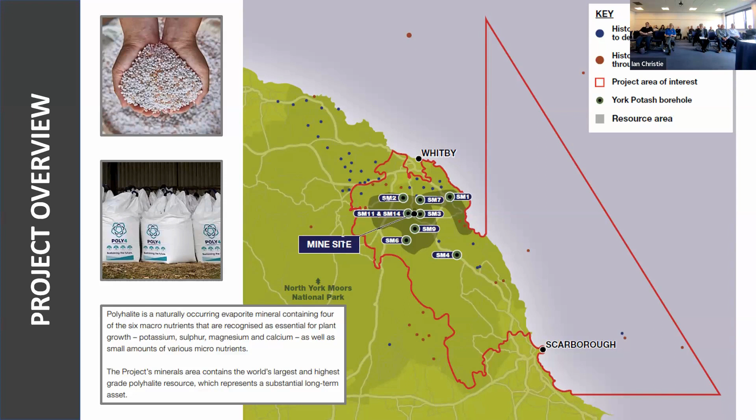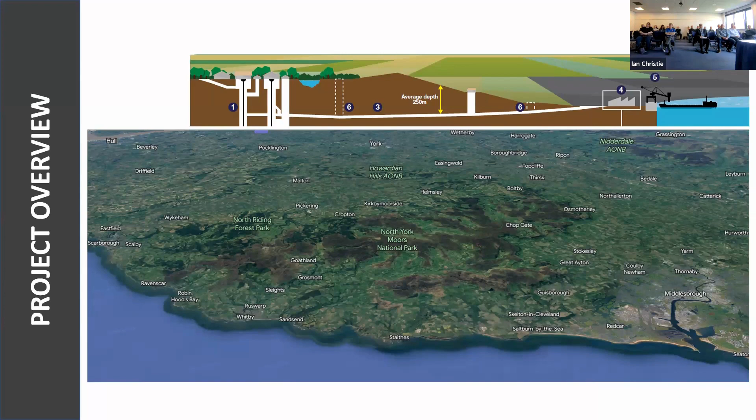So it's not to scale, but it gives you an idea. If I just crop that diagram up a bit, and I've taken a screenshot from Google Earth, there's Middlesbrough, and Whitby's about 3/4 of the way across. Because the site doesn't just comprise Woodsmith Mine, there's kind of 4 locations really.

We've got Woodsmith Mine where the shafts are, near Whitby, just up onto the hilltop. We've got an intermediate shaft called Lady Cross, that's in construction at the moment. We've got another intermediate shaft about halfway along the tunnel, Lockwood Beck. And then we've got the materials handling facility.

So what links them all is this tunnel. You might have seen on LinkedIn, Strabag, they're driving this tunnel using TBMs. Originally we were meant to launch 3 TBMs, one from Whitby coming this way, one from Middlesbrough going that way, and then one in the middle from Lockwood Beck. I think I've got the next slide on it, running whichever way it was running - 3 TBMs.

Basically, when Sirius Minerals got into difficulty with money, things had to be chopped and changed around. They decided to get rid of the other 2 TBMs, and this TBM will do the full 37-kilometre run. It's now broken some world records for the length of 1 TBM tunnel, I think.

I think we're just near Lady Cross. It's got about 1.5 years to go yet before it actually gets to Woodsmith mine at Whitby.

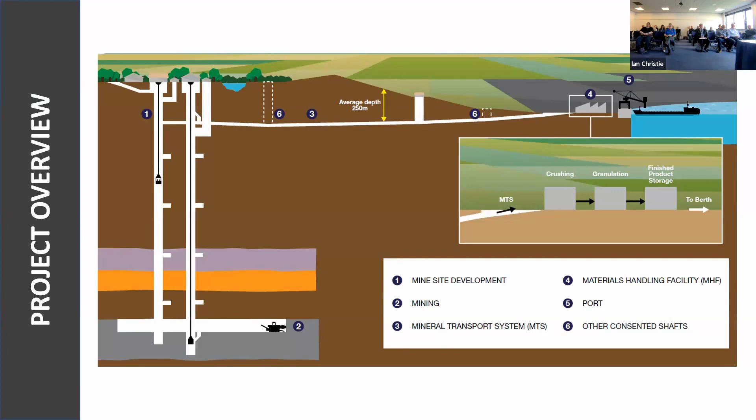So the tunnel is going to transport the mineral when we extract it from a mile deep. It's going to come up the deep shaft and then travel along that tunnel on a conveyor belt, taking all the trucks off the roads. Obviously in the quarries we're used to the trucks leaving, other than Glensanda, a place like that. So this takes all the trucks off the road and it goes all the way along the conveyor belt to Middlesbrough. That's the purpose of the tunnel.

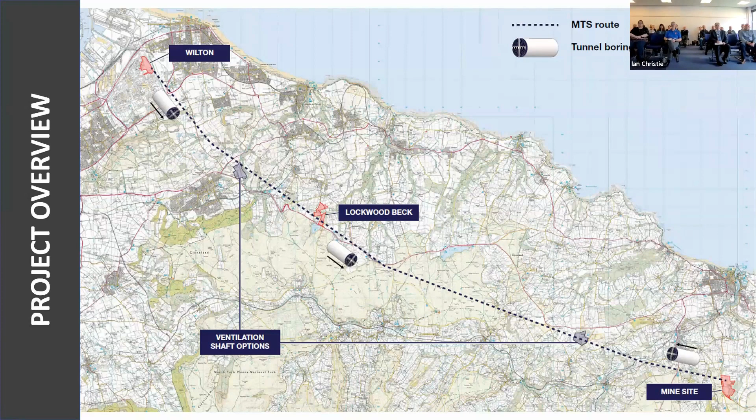So we're underway with that. This one just shows you them 3 TBMs. So it was Lockwood - one from Middlesbrough to Lockwood, one from Lockwood towards Whitby, and then one from Whitby. And they sort of scrapped them too. We didn't even get going with them.

Current figures, what we at, Charlie? About 750 meters on one of them. Yeah, 750 at one and 6 to 8. So we're sort of near enough halfway on one of them. The other one started later, so it's a bit behind - a few months behind.

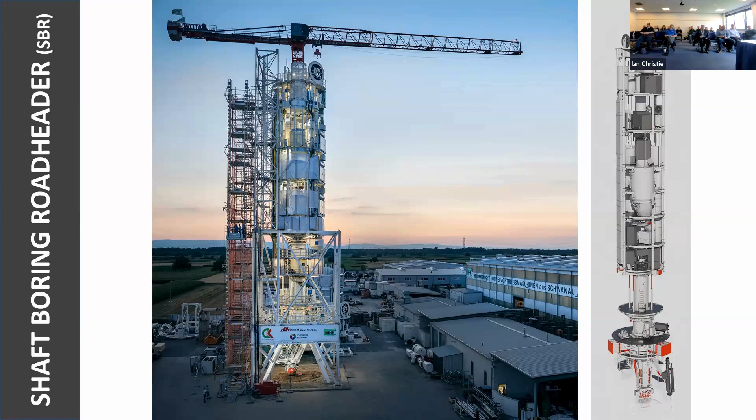So it's got a head with the picks on, the drum spins, and as it swings forward it takes out what we call pizza slices, basically. It just keeps cutting the rock, keeps going down.

So that's the deep shafts. The shaft that's just to the side, this one - this is where they were going to launch one of the TBMs, the one going the other way. Even though it got scrapped, we still need this shaft and the tunnels in it to access all the different levels underground, keeping everything below surface.

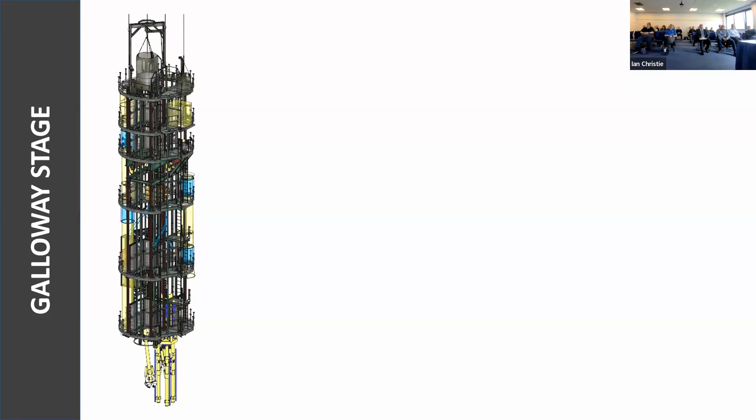So this is the one that I work at mainly. This one is kind of old school - this is drill and blast, because it's not deep enough to warrant buying an SBR like on the other shafts. I mean, we're only sinking 350 meters, and the SBR is 64 meters tall. Like, it was not worth it.

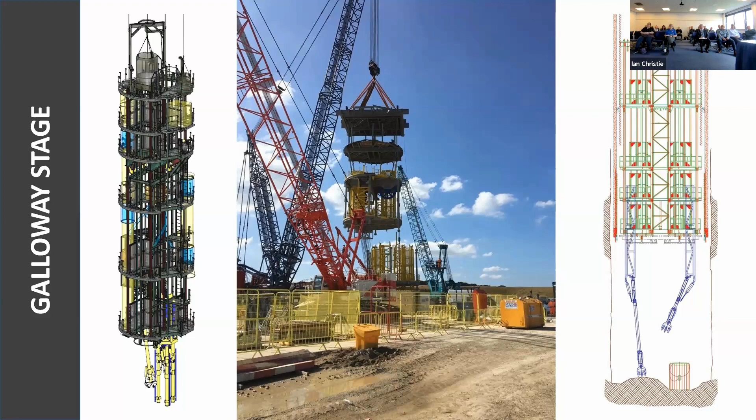Concrete lined, ventilation running down the other side, with air and water pipes. That Galloway stage can move up and down the shaft - it's on the ropes, and we tell the windman to move it up and down.

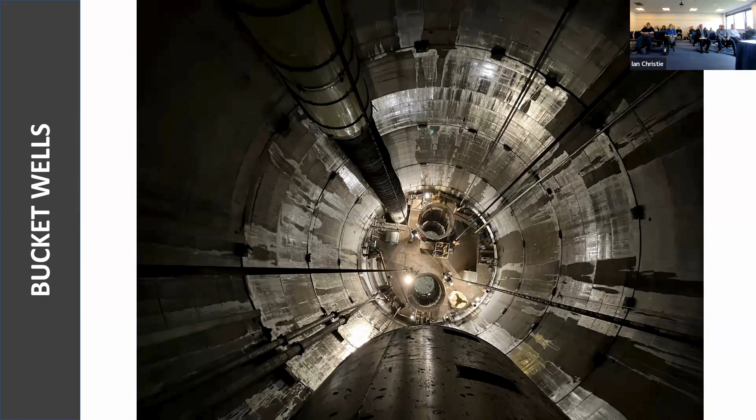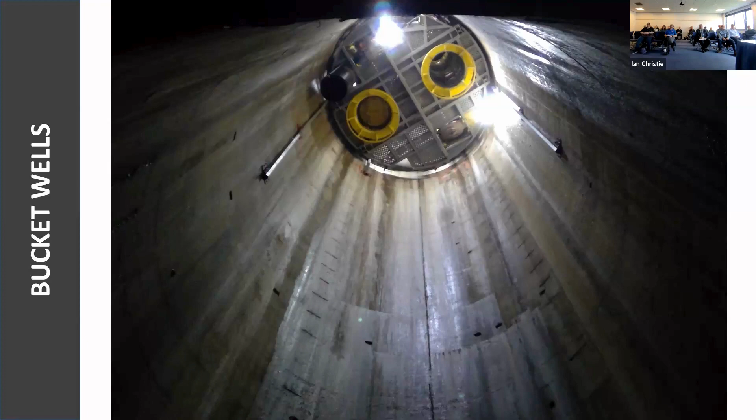That's me looking back up. If you look at those two holes, the one on the left has a bucket sat there. They're only 1.9 meters diameter, so everything you need to get through has to fit through a 1.9 meter circle. In a bit, when you see other images of the machinery we've got down there, I can't believe how we've squeezed them through the gaps.

That's another image looking up. You can see the two grabs - they're locked into the Galloway, and when we need them, we lower them down and they grab the blasted rock.

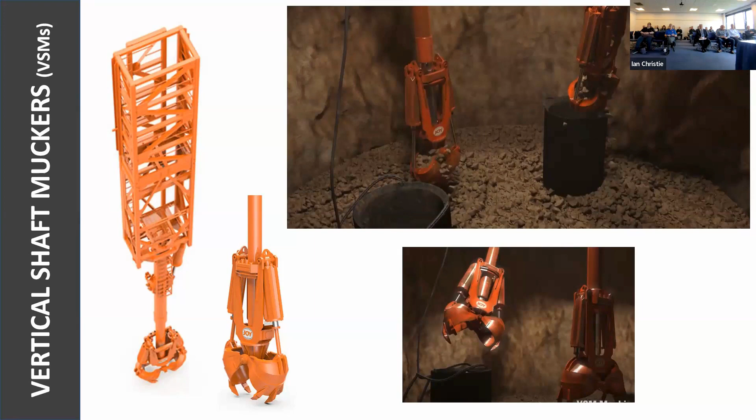Komatsu VSMs, vertical shaft muckers. That's a video on YouTube, an animated video, and that's what they look like - monstrous things, you don't want to be close to them when they're operating. Nobody's allowed down, everyone has to stay up on the Galloway stage, quite vicious things.

So that's the mucking cycle. Just flipping back to the drill and blast bit - Jumbos, we've got two of them, but both have got two drills, so we can have four drills going at once. These are again monstrous, 14 meters tall.

The hammers, everything was too overpowered for the mudstone we were in, but it did the job. They'd be better suited for a granite. That's kind of like the mudstone we were going through - well, we're still in it now.

Just watch your fingers, it does get a bit sharp. When the air gets to this rock, it sort of starts to crumble a bit - there's bits and pieces falling off all the time.

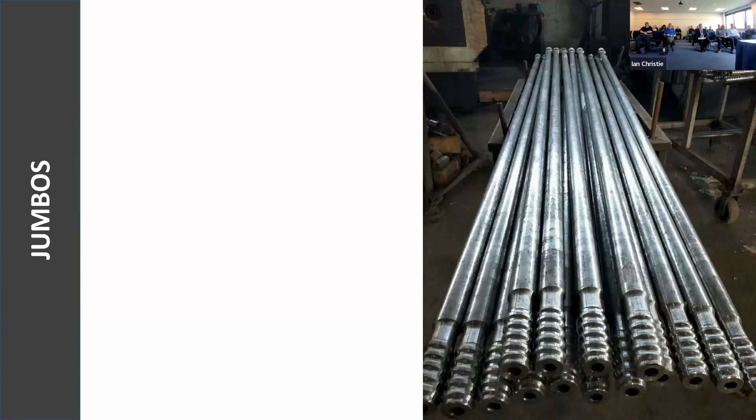Drill steels were 4.8 meters, T38s, top hammer, button bits. We tried some cross bits, but with that many people on the drill rigs, you never really got feedback as to which they preferred. I had some lads say, oh, we like the cross bits, oh, we like the button bits - made no difference to me.

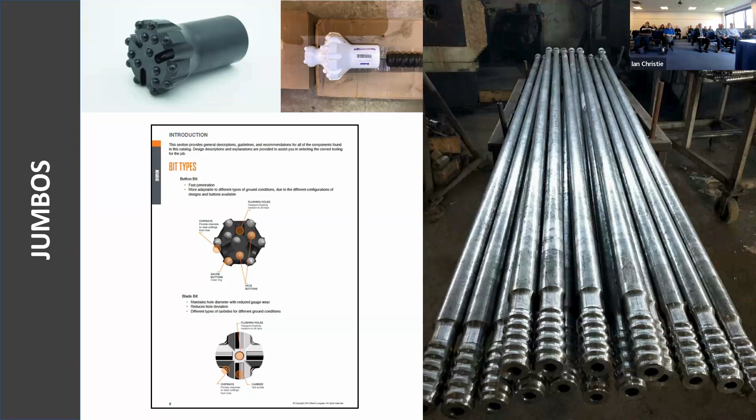So we drill the hole with 64 mil top left, and then we ream it out with this bigger 127 mil drill bit, the white one.

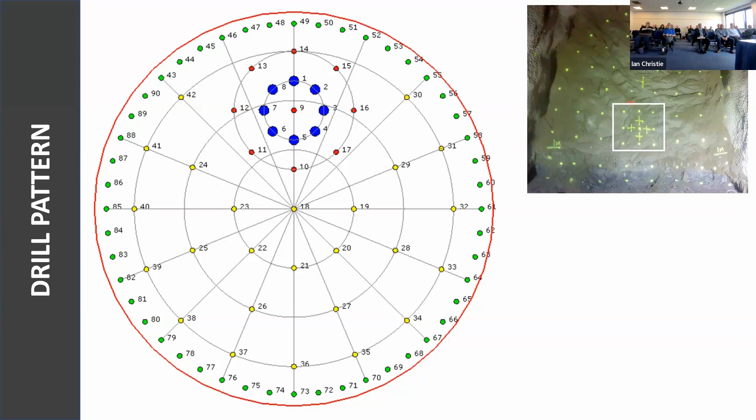So we had void holes 127 mil, cut holes 64 mil, bulk holes 64 mil, perimeter holes 64 mil. And there's other names you might have heard in the past, like ream, easers, contour.

When we started with Redpath, the Canadian shaft sinkers who are here on the project now, they weren't there at the very start. So when we started, it was just Gallagher's and Anglo-American.

I made this little tool out of a piece of 110 volt cable and a bit of wood. All I said to the shaft tech was, give me the centre of the shaft. I'd get someone to stand on that, then I'd pull it out and swing the wire around, and when it pulled onto one of these tape marks where the little red tags are, that's where I'd spray the dot.

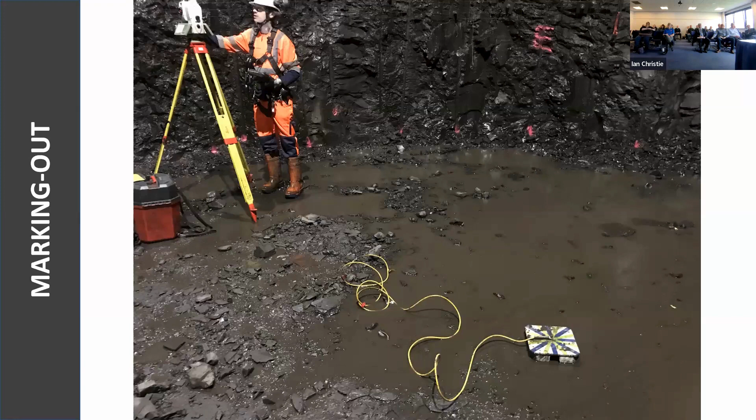So that's me marking it out, and that's the result. It was quite good, working from the centre, just swinging it around, spraying the dots.

The Canadians were like, no, what are you doing? We do it from the edges in. And I'm like, well, it's whatever you want to do, but that's what we're doing at the moment. We're rolling with it, and there were no issues.

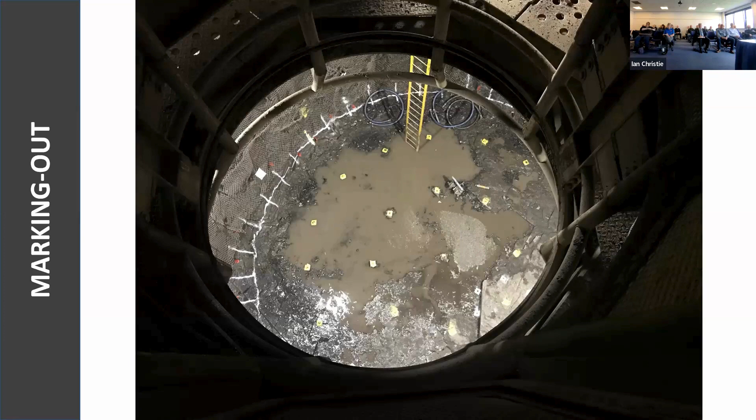If you look at this one, that's a mega blast we did with three burn cuts in it. That was the biggest blast we did. It was when we started to widen out, so it was quite complicated to mark it all out, do you know what I mean?

There you go, that's what it looked like on the Shot Plus software. When we widened out, there were four big blasts we did, and this was the biggest one.

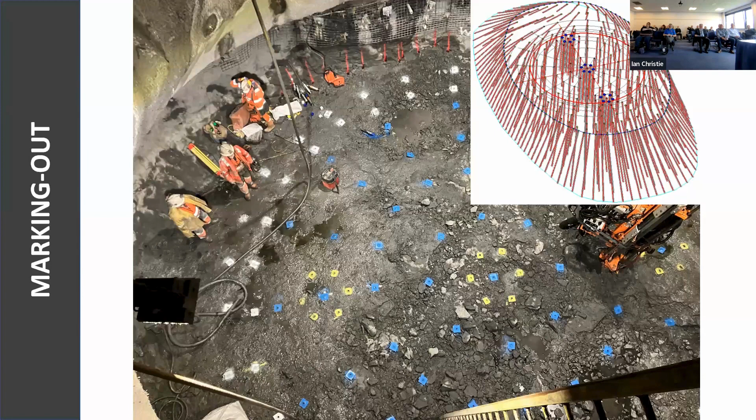After all the years of quarrying, I remember doing some really complicated blast designs at Glen Sanda, with 3D modelling over lumps and stitching together surveys. But that's probably the most complicated one I've ever had to do, because the angle on these was something like 40-odd, 50 degrees.

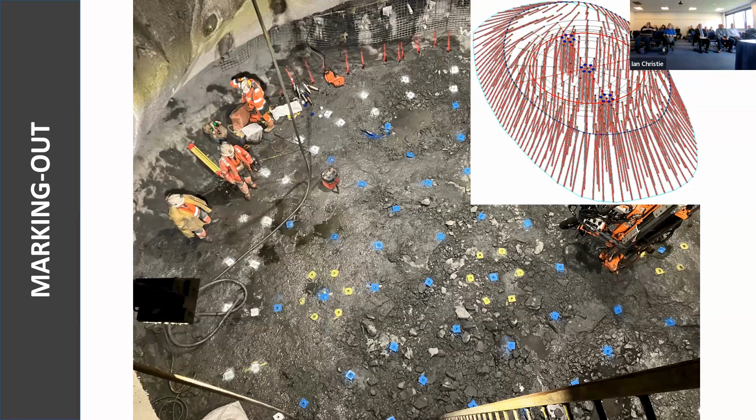You know what it's like - the holes at the top are this far apart, but at the bottom they're now 1.5 meters apart. It was horrendous to get that running with the 4 drill rigs going.

For explosives, we would bring them down in this kibble bucket. Again, it has to fit through the 1.9 meter hole, so it's a specially made bucket. Land it on the floor, unhook the rope, and then it's there for us to take the explosives out.

All packaged explosives, we didn't use pumped emulsion. There was talk of it a while back but we never got it off the ground. We're talking about it now for the next phases. But the packages, I love them - easy to handle, you know what stock you've got.

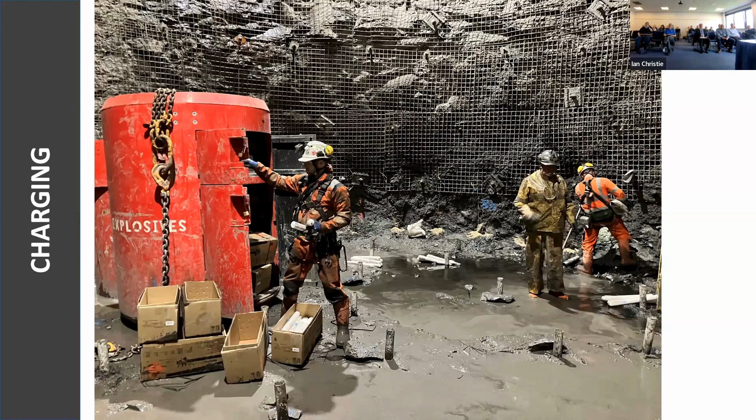It's really easy. They're only 4.5 meter holes, and we've used B&Q screwfix drain pipe, 2.4 meters long - go buy some, get it in the van, cut it into 0.5 meter lengths, and shove it in the holes to protect them, because you can see how shitty it is down there. You'd lose a hole, no problem. So you needed those collar pipes in.

John Percival's in that photo there. And then that's us unloading, placing at each hole what's to go in it. Right, go, get them in.

My other battle here with a lot of people was what to use as stemming. I'm used to quarrying - chippings, gravel. I had to argue quite a lot to keep my way. So we used it, and we brought it in these sandbags, all filled with gravel, ready to pour into the top. All the underground guys were like, what the hell's this, it's chippings, oh my God, you're going to fire it all over the place. So I stuck to my guns, and that's what we used.

Products: Senatel Power Frag, Orica, 53 mil - probably a bit smaller than what you might use in the quarries, like up to the 70s and 85s. It's a funny size product. 32 mil would be more, or 25 mil diameter would be more typical for underground, but because we were drilling the 64 mil hole, we could pack it with this stuff.

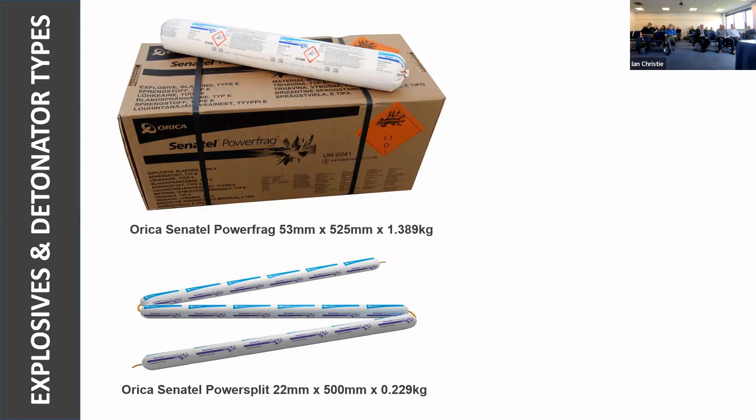Power Split for around the contour, around the edge. I like that stuff because we'd pre-cut it to 3 meter lengths, 3.5 meter lengths, fire it in the holes, dead easy. Icon 3s.

We were going to use shock tubes from EPC, but the quarry mine manager who took over when Anglo American bought the project in 2020, he'd been in Australia using Orica and Icons, and he immediately said switch out for the Icons. No problem, whatever - doesn't matter to me, we'll use whatever you want.

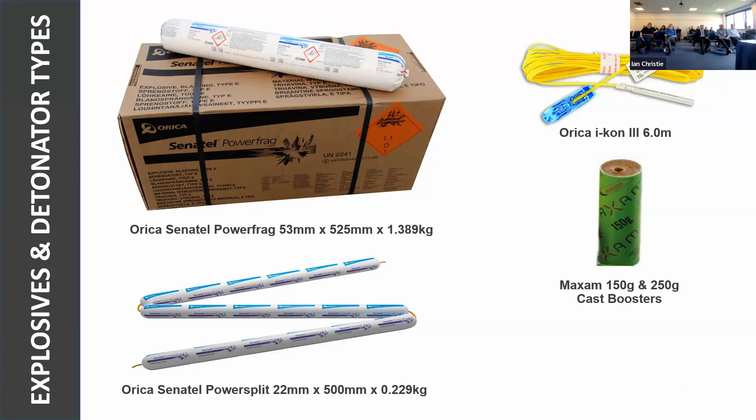I know it's detonator sensitive, the power frag, but we'd already bought 3,500 of these cast boosters off EPC, and they weren't going out of date, so we used them up. And then some mini boosters, we had a mix of reasons for them. We've used them on the power splits. The late Malcolm Ingray actually said to us, just please sellotape one of these to the power split, but again, even though it's detonator sensitive. So that was sort of Orica's product range.

The only difference, we have had some 32mm, quite a lot of 32mm power frag for the tunnelling bit, which I'll show you in a minute. And we've had some 10 metre Icons as well, which are really handy, because when we do the tunnelling and the holes are up at 3.5 metres and they're 3 metres deep, you've now got a nice long lead coming down to this height, ready for logging them on.

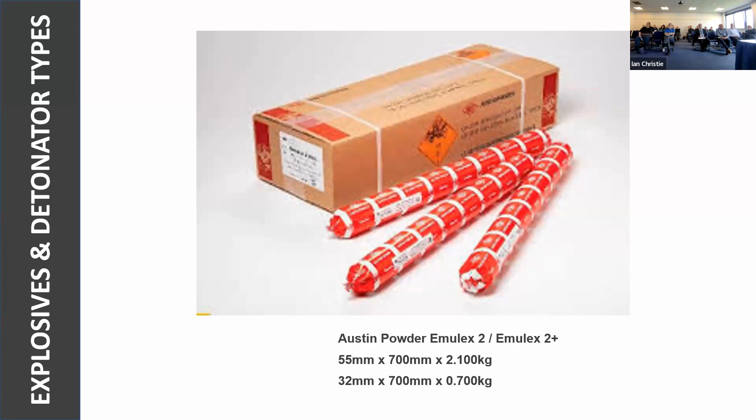So we've had some Brexco products as well, 55mm and 32mm. It's similar to the Power Frag, similar spec sheet. The only problem with this stuff is it's 700mm long, and it can give me a bit of a pain to work with when you're trying to put it in the holes. I like the Power Frag's half metre long, you know as well, when you're drilling holes, everyone likes to keep within these half metre lengths, so it's just easier for your calculations. Sometimes we're having to cut that in half, which can get messy, especially with the open end. The other thing is they're just a bit wider, 55mm versus a 53mm Power Frag. You won't think it's much, but when you're trying to get it in a rough hole it just gets stuck and ripped, and you know what it's like.

Void holes. So although they don't get an explosive charge as such, we won't charge them. What we did do was put cast boosters at the bottom in the water. They fired first, and then the round started to fire. The idea was we thought, well, let's clear the water out, and then they are void. Did it ever work? We don't know. The shaft got sunk, so it must have done something. But the Canadians had never seen it before, they'd never done it, and they thought, well, that's actually a good idea, never really thought of it. So using the Icons, great, just fire them on a zero, and then I think I used to fire the first hole on 1000. So it gave a whole second to atomize that water, shoot it up, and then start the round.

The yellow holes, if you will, cut, or the red and yellow, pretty much cast booster, icon, 4, 5, 6 sticks of Power Frag. But when you're charging your quarries, have a look at that design. Would you do that in a 3.5 metre hole in a quarry? No, well I wouldn't have done. It's like the other way around, isn't it. We'd normally have like a small charge in, like toe holes, if you will. You'd put a little charge in the bottom and it'd have 2.5 metres of stemming. Here, it's the other way around, and I'm like, well that's wasted, it's got to be wasting. I'm used to doing it in a quarry and seeing the results, but you lot, the underground guys, are coming out of the mine, the tunnel, the shaft, then firing it, so they're not actually seeing it. So if you can't see it, all they do is just overcharge everything. I mean, it's overcharged, which I'll prove in a minute.

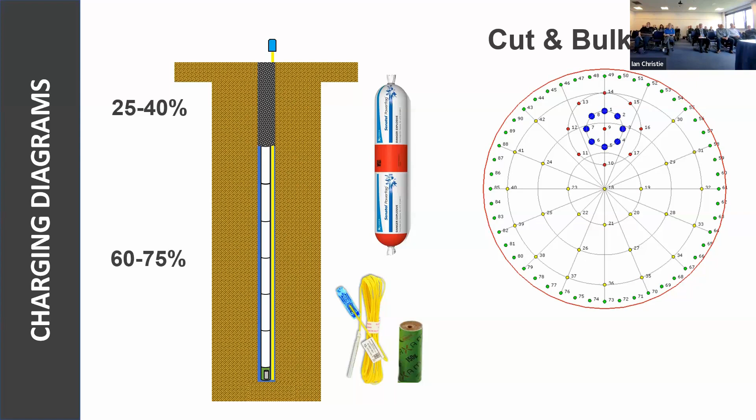So yeah, 60 to 75% charge, 25 to 40% chipping, stemming. Perimeter holes, power split, we used to sort of bunch 3 of them up at the bottom just to give it that little kick at the toe. Rather than sellotaping a Power Frag or anything to it, we just fold over the power split, mini booster, recycled explosive boxes rolled up into little cardboard tubes, and then pour the chippings on top so that the chippings don't all come down the side.

Again, it worked, I do have a photo. Yeah, similar ratio, we used to bring them up a bit higher, but again, half a metre long. Dead easy, 4.5 metre holes, half metre long power splits. So I used to just cut them to where I wanted them, you didn't have, you know what I mean, so it went up a little bit higher in the hole, but again the results were good.

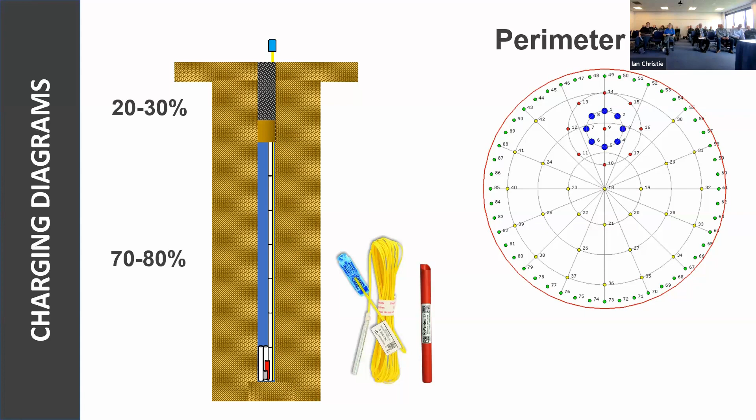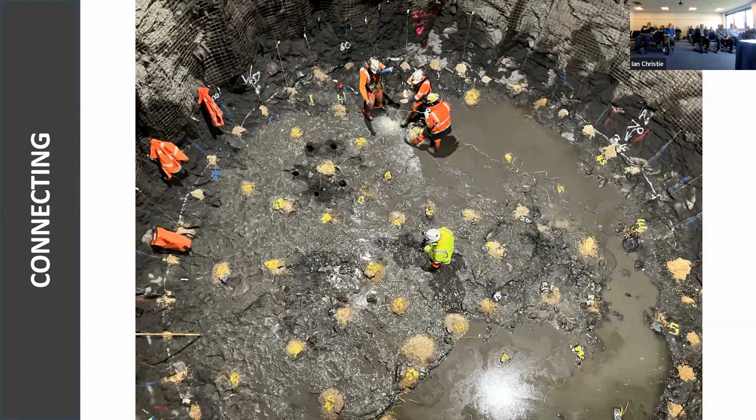Then there's like a little cage that keeps us safe, so it's even smaller, and it looked like that. I'll go on to it in a minute, but Herrenknecht wanted us to put 2 detonators in every hole, and we had 109 holes, I think it was, so there's 218 detonators.

Like, oh my God, we were just literally keeping a bit of a dry line, a washing line, and just kept clipping on and on and on. Just got, well, it's manageable, we just climb the ladder and come out, but you didn't want it, you wanted minimal people down there at that point, yeah. Because we had one day you trip over these things, they pull in the clip, and then when you come to top, it reads an error, you have to go and re-clip it on. You'll know if you've used them.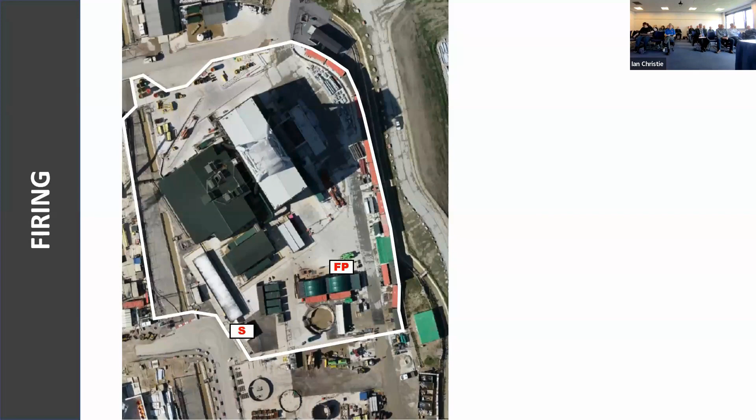So that was connecting up, so firing time, everybody out the shaft, yeah, nobody was ever in the shaft. And then we'd sort of, that's that white line that just came on, then that's kind of like a fence, a black mesh fence all around, which made life easy for maintaining the danger zone, if you will, maintaining the head count. And we just sort of basically said, right, nobody anywhere near the shaft, the firing point's there near them containers, and we had a sentry on a turnstile who wouldn't let anyone in, lock all the other gates. Brilliant.

So just on that, when we started, there's 2 of the main directors from Anglo-American. They'd had instances, let's say, I think one was in Australia and one was in South Africa, where there was, would you believe, somebody in the shaft when they fired the shot. And they were absolutely adamant that we got that right, because in fact they delayed us for a whole week, they wouldn't let us blast until they knew that we were going to keep that under control with everybody. So we do have ID cards, which are electronic, we've got little brass tallies on our belt, and then we do a full sweep of the area, and it's quite robust, yeah.

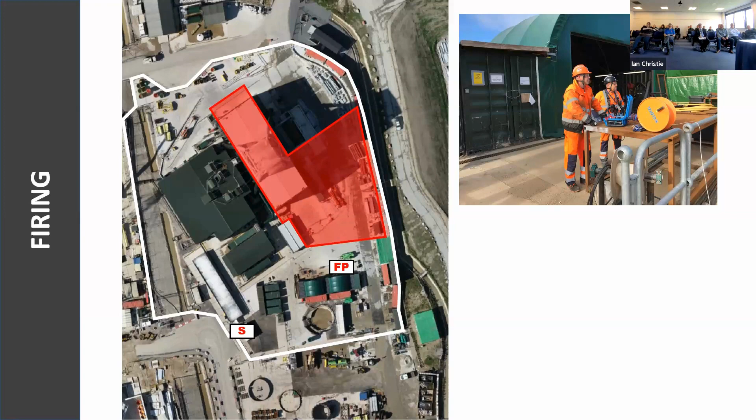That's us firing there using the Blaster 3000, that's hardwired in, yeah, you can see the white cable. So basically that's running all the way across the yard, all the way down the shaft. Well, it switches to an armoured cable, goes all the way down the shaft to the blast. Whereas on the other shafts, we've started to do Wi-Fi firing, which is really good because they're 750 metres down, and we don't have a cable. We never envisaged any blasting in the other shaft, so we don't have a cable ready. So the Wi-Fi firing with the Blaster 3000, absolutely brilliant, we couldn't live without it.

There's a little firing point, oh yeah, so he's on a rusty table. So I decided to make a nice little stand for it to go on.

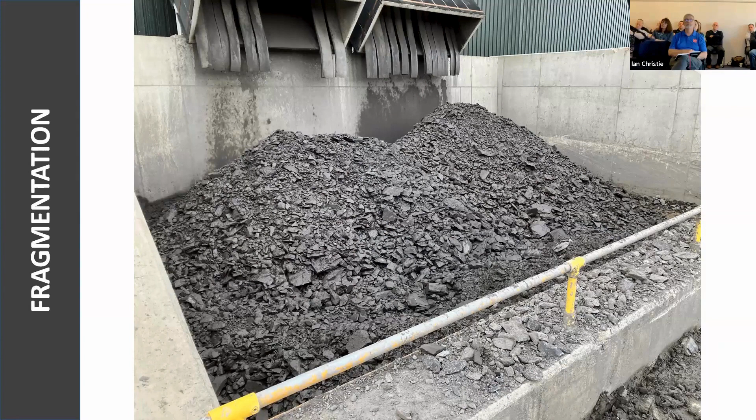The mudstone broke up pretty easy, it's all laminated and bedded sort of horizontally. So when we drilled them 4.5 metre holes, pushed the button, it just pretty much broke it up, you could get away with like a hole that was blocked and things like that.

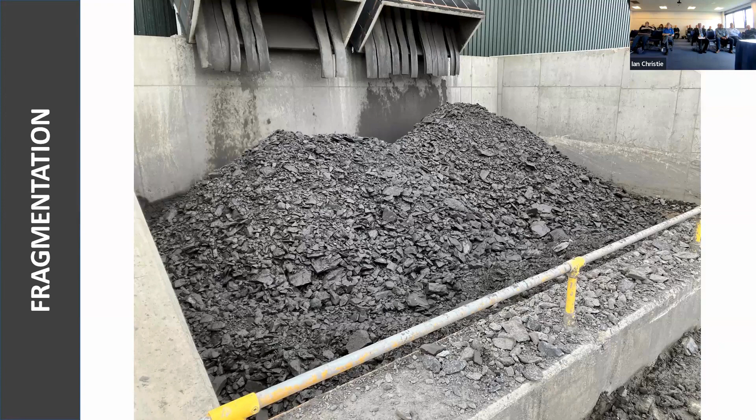There must not be enough free faces like in a quarry. Somehow it just doesn't crack - it didn't crack the bottom. And when they were digging, all of a sudden the sides were getting hard, so it hadn't really cracked between. It might work in hard rock, I don't know. But yeah, it was... I don't know what to say.

I sort of got told off for it, but then I also reminded them that at the time I tried it, it was a good time to try it, because where they wanted to try it, it would have been really bad if we'd fired that blast there - the Canadians and that. So in the end, it was all right.

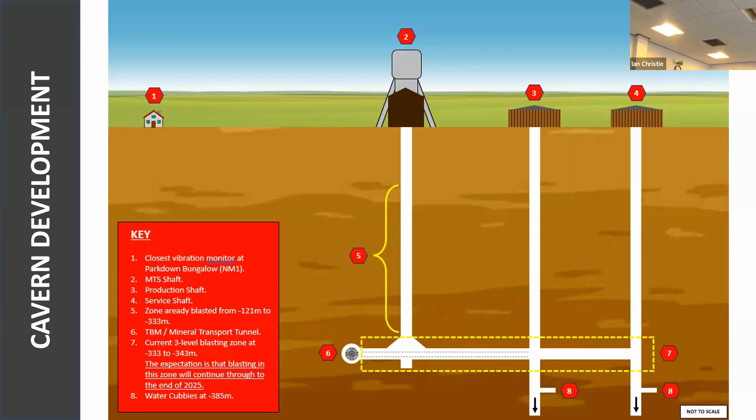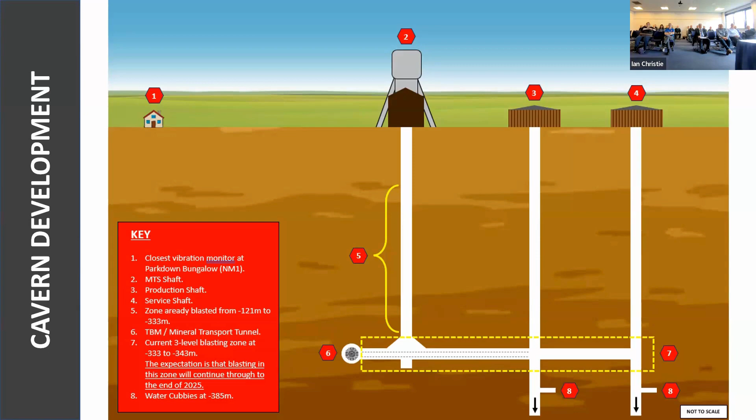So then we arrived here, then all of a sudden we have to widen out and start all this tunnel work. Can't just think of the date we arrived at that 333 meter mark, but anyway, that is what we're on with now. So if I just go back up, you see where it bellies out at 40 odd degrees, that's that grey bit, and then we've to do all these tunnels - that's what we're calling phase 1 at the moment. Phase 2 you'll see in a minute.

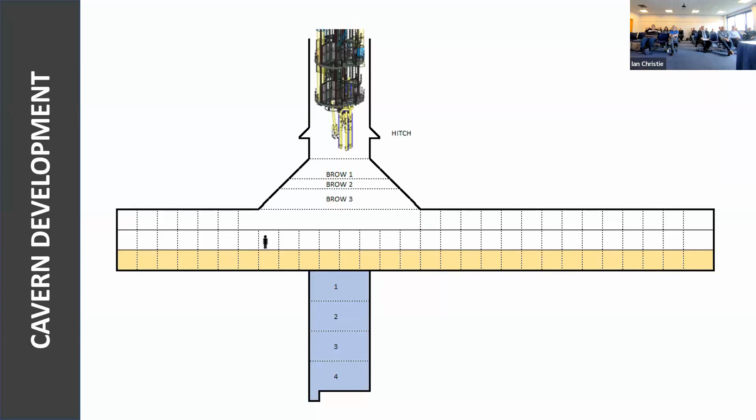We're still only 10 meters diameter here, we're not really opened up. It's 4 drill rigs, it's quite... there's probably like 8 people on that footprint, like in that shaft at the moment.

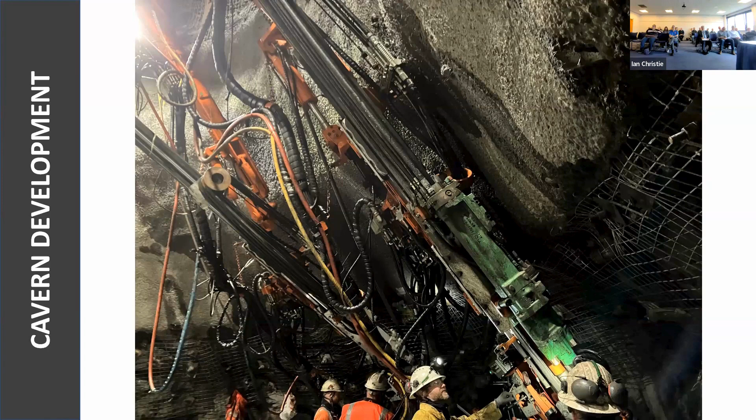So you can see there, we're literally touching the shotcrete to get the maximum, as many holes and as much volume as we can get out of that blast.

Controls are now up here - he's trying to, the wall's riding up and I'm wanting him to drill up here. So he's put the drill bit on and controls are now... so a lot of challenges.

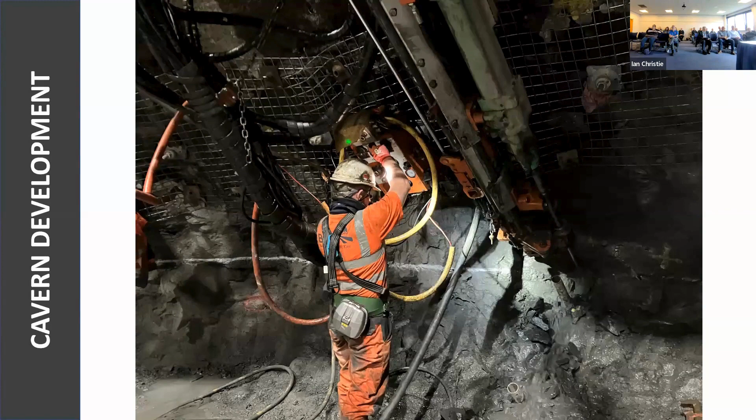That drill is maxed out - it will not go any further, and it's pretty much right up against the shotcrete.

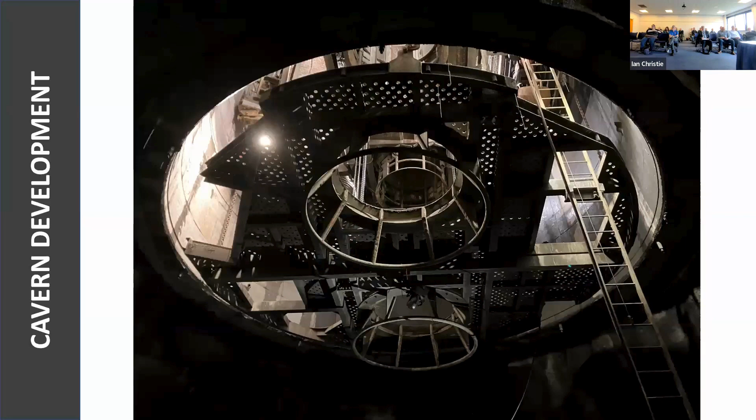But all the madness and all the hard work of trying to run around, organise - so I'm running around on that bench, telling them angles and depths, and they're all screaming at me, 4 drillers. It only takes them a few minutes to drill a hole, and then I'm being shouted at across the other side with my clipboard. The hard work paid off, which you'll see in the next photo.

We've got the blast out, and that's the Galloway - it looks like a rocket, doesn't it? That's the Galloway, it's just a good photo. You can see we've lowered it down, and that's probably the best photo that's been taken. Unfortunately, not by me - all the others are from me.

You see the angles and stuff that's at - some amount of volume. One of them blasts, we used 1,900 kilos. It's not a lot in quarry terms, but that for us was huge. We were using maximum 750 kilos in a blast, maybe around the 500 to 600 mark normally. Some of these were like nearly 2 tons, so that's a lot for us.

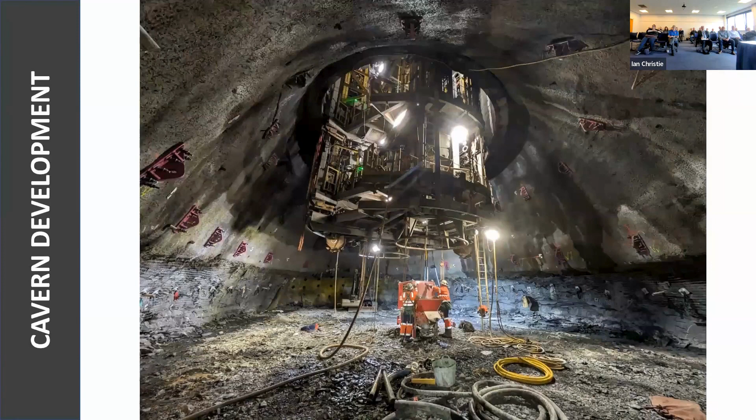So now we got down and then we had to start tunneling. The yellow mesh at the very end, we had to start tunneling that way. And there's one behind me, like on the photo there. Basically tunnel in B and B, if you will, the north one and the south one.

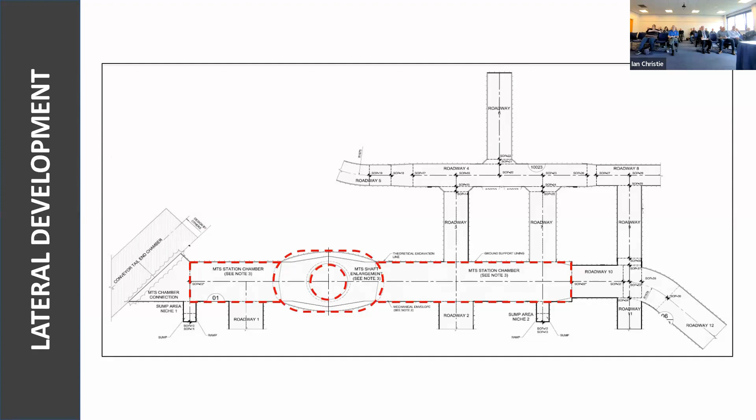By January, when I did this presentation at Wetherby, we'd took out that area. And as of today, in the past sort of 4 months, we've taken out them patches.

And what you see there, most of it, let's call it 75%, has been done with hand drills, would you believe? Not good on hands at all, we know that, but we couldn't get a jumbo in yet. We've got one in now, but yeah, hand drills, old school. To be fair, they're really good, you know what I mean?

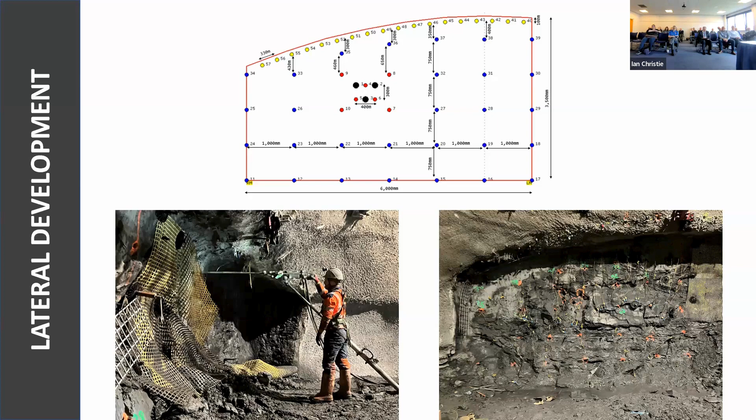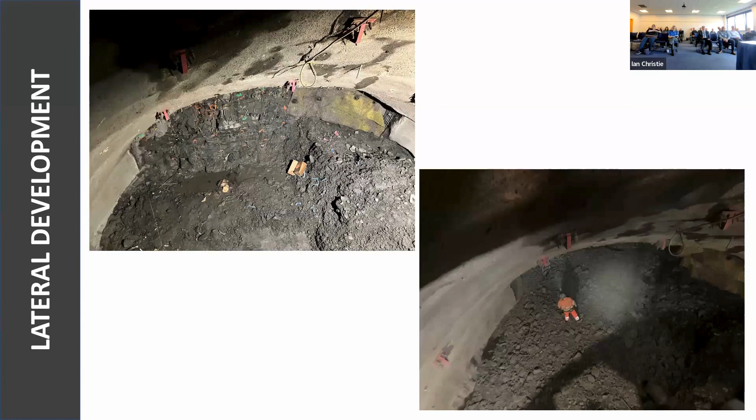That's actually the first blast in the north side. We peckered in a bit, I think, and then that was our first one. So that's before the blast, after the blast. And then I've come down and took the photo looking up.

So a good fragmentation. We use power split again in the roof, you can see all the barrels, bit skew width, yeah, not very. Again with hand drills, they've got to be. A lot of them were new to hand drilling. The Canadians had done a lot of it, but the Brits hadn't really done any - some of the coal miners.

So now that photo was taken not that long ago, a couple of weeks ago maybe. That's me looking south. So we've took all that out with hand drills, 3 metre blasts.

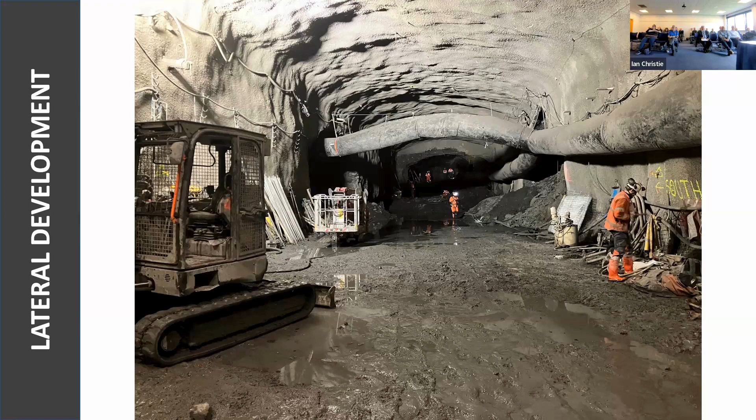And then, can you see the ventilation going off to the left? That's us started one of them other headings that you saw coloured in green. And I think this photo I literally took Friday night, so you can see the back wall, where the lads are right at the very back. But this one, it looks similar, but it's actually a bit further.

And what we've been doing is rotating the blast. So we've got roadway 3 in there, we'll blast that on like a Monday, say. Tuesday we're at roadway 5. Wednesday we're in the other one. They're all at different stages, all on the go at once. We're back on 24 hours now, so it's quite mental for me.

There's a lot of me wanting to know how many detonators did you use, lads? How much explosives? And I'm getting texts at the weekend coming in, and I'm trying to keep on top of the paperwork at the weekends, typing in the figures.

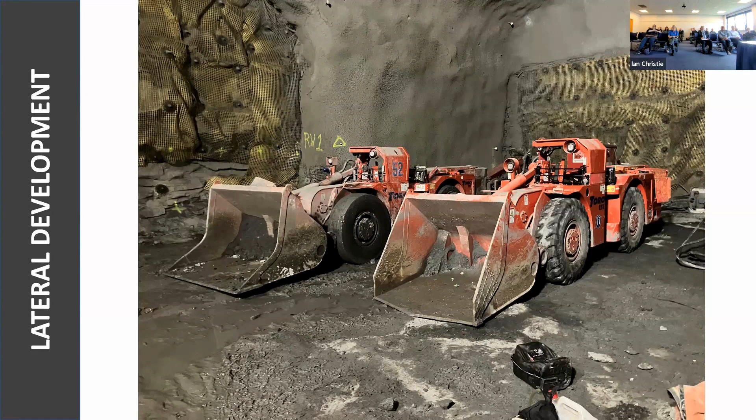2 Toros, we bought them off QME in Ireland. Bear in mind that they've come through them holes - we've took them apart, sent them down, and built them back up. I mean, you wouldn't, they're bigger than 1.9 metres, you wouldn't lift that in one go, would you? The next one's better, so we bought that off QME Mining.

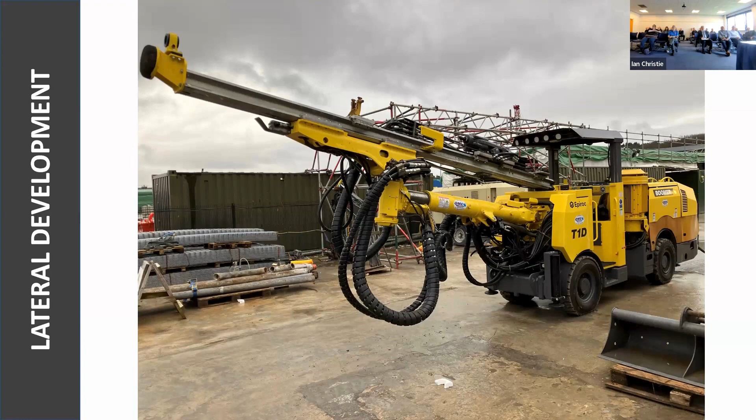Let's get rid of the hand drills a bit, let's get the jumbo in - one arm, one boom. But that's not going to fit. There it is, totally in pieces, coming down. You literally couldn't strip any more off it - there'd be nothing left of it, would there?

So that's it, that was just 3 months ago maybe. That's it landed, fitters straight on it, trying to build it up a bit more, and then that's it drilling. I think we've done quite a lot of blasts with this now. I was just looking through it before - we've probably done like 10 or 15 blasts with this jumbo now. So it's good, like.

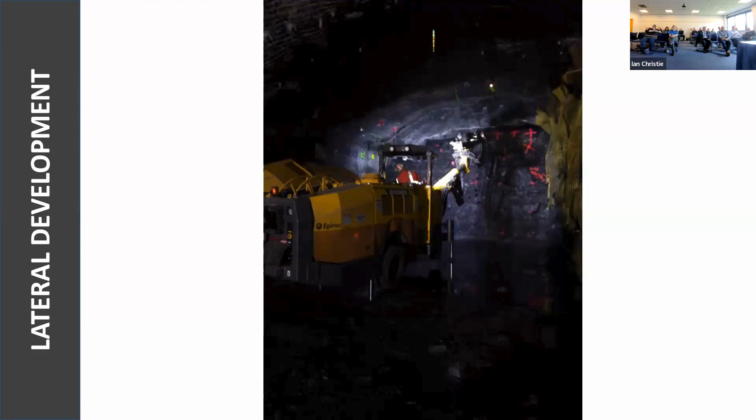Yeah, another picture there of him drilling the reams or the voids, and you can see the power split holes across the top again. We okay for time at the minute? Yeah.

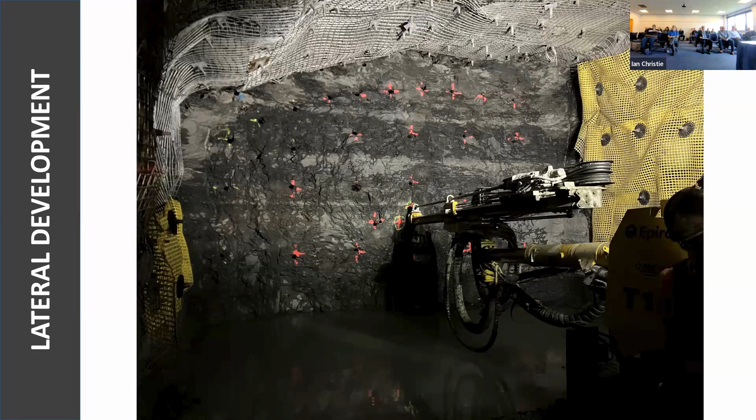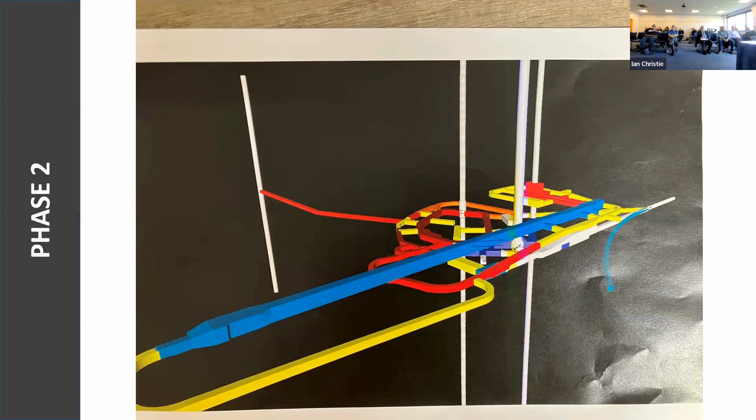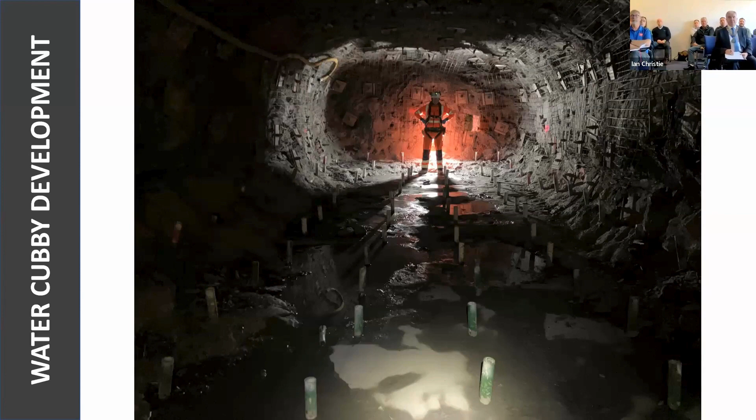So they managed to get the top section out, but it took them ages. So then they said, can you come and blast the floor? That's what the water cubby will look like. They said, can you come and blast the floor out? Yeah, no problem. So they drilled holes - you see them all lined up, the pipes, 32 mil power frag. Blast it out, brilliant. But it was a world's first.

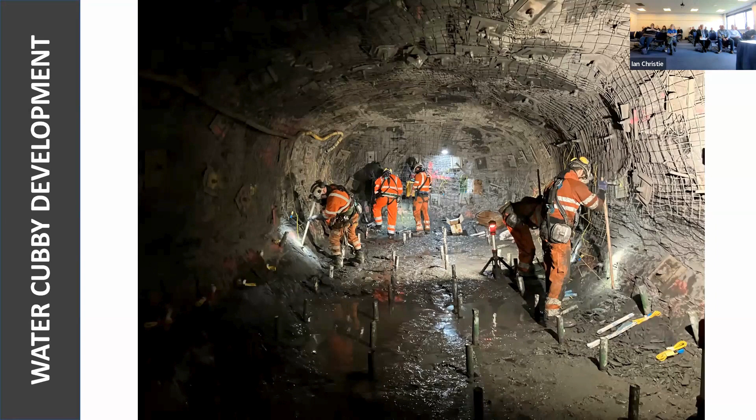Yeah, I haven't put a picture on, should have put it elsewhere. Those SBRs with the head sat just 3 meters higher than sort of where I am now, up the shaft. They've never blasted underneath an SBR before. It's the world's first, this blast was the world's first. So that's me on the SBR. That's how high it is, looking at the blast, and then that's after it. It just came rocketing out.

In fact, it was so good, you could walk in to there. You went up and over, if you will, into the power trough, and you were walking on the hard floor. It shunted the blast so much, you were now on the fresh floor. Couldn't believe it. And you got 700 meters of shaft below you.

So they stopped at that point and let us get in. They stop each time they get to the white rectangle, if you will. So stop, take out the cubby, then carry on sinking. At the moment, I think we've done 2, like 1 on each of there, and then 1 of these. So we've done 3 out of the 8.

So the second time round, they said, right, we're not going to pack it out, it takes too long, just go and blast it. So that's us sunk down to 300 and something meters. And then we've got to take out 14 meters, 4.5 by 4 point whatever. So that's us, hand drilled, ready to go. Oh, that's a good photo.

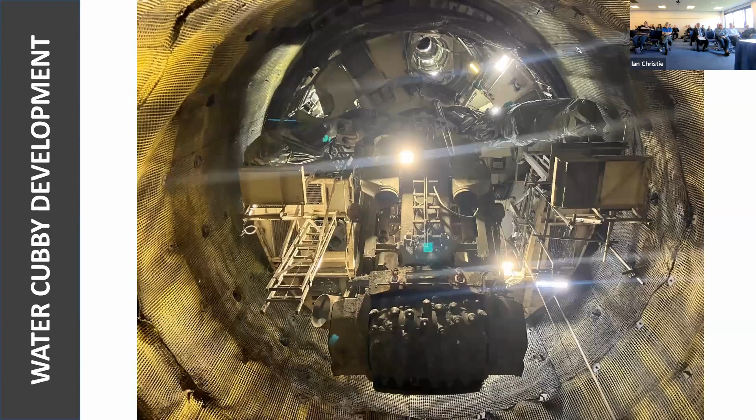So that's how high this is - bearing in mind this machine, you're talking, I don't know, it's £20 million to buy. You damage it, the whole shaft stops. That's multi-million pounds. And they're like, well, will you damage it, Ian? I'm like, well, I don't know. Will we? Well, you know, you want it blasting out, you want it smashing up, but you don't want to damage that machine that's literally parked above my head. You can see, I've just turned my camera up and took the picture.

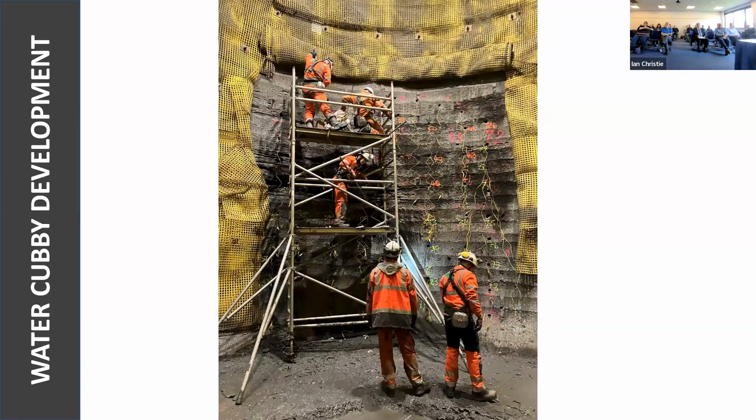Like, oh my God. So we knew from the other blast, the floor one, which was like a mini quarry basically, that had a bit of play in it, so we had a bit of room. This one was fresh, firing straight out into the shaft. Anyway, fired it, no problem. Gets better than that though. That's the kind of result we were getting - bit raggedy on the edges, but I think I got, yeah, so the power split again.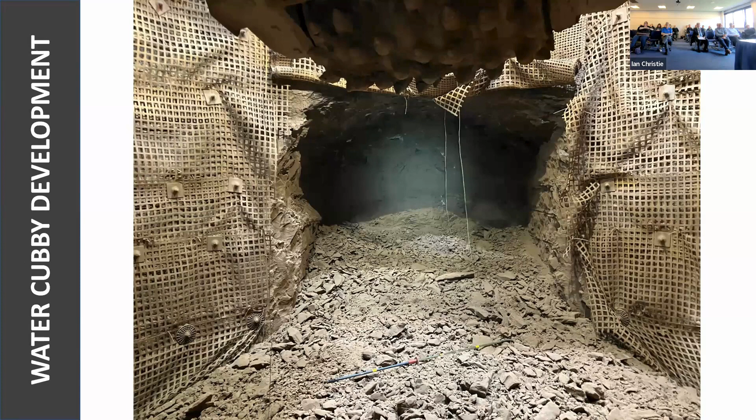Anyway, we carried on, 5 blasts in, 14 meters deep. Everyone's happy. Some power split photos, basically. But next problem.

This layer here at 800 meters to 1,000 meters - that's 200 meters thick, the same thickness that we blasted at the MTS shaft. It's hard sandstone. They don't think the SBR can get through it. Neil, can you blast it? I don't know. Where's the SBR going to be parked? Oh, 3 meters above the blast.

Talk about how many holes you want blasted, how smashed up you want it, because this machine grinds the rock and hoovers it up. So they want a blast they can just hoover up. I'm like, well, you've got to overcharge it like mad because you want tiny pieces, but your machine's parked right there.

We're not at 800 meters, we're not at the 200 meter thick sandstone, but what we're at is a thin layer of it. They said to us at about 510 meters there's a 2 meter band of this hard stuff. Let's have a trial in it. So this was me being asked to blast with the thing 3 meters up.

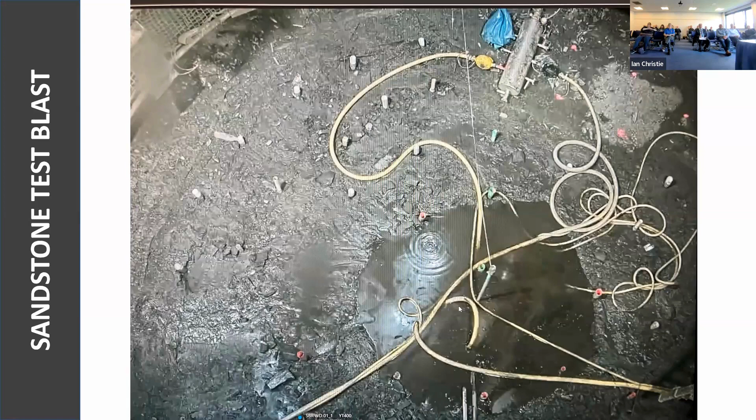So that's me coming in on the morning. The holes have been drilled, you see the pipes in them. So I'm going to go get the explosives and we'll go down. Loading up, 32mm power frag, 2 dets in a hole. If you remember the diagram before with all the icons coming up, that's this one.

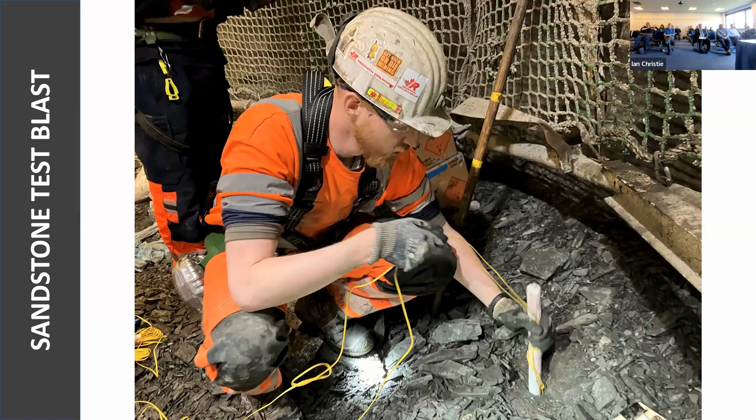I was OCD with the charges. These holes were only 1.2 meters deep for this trial blast. We were down - I made a device, a little wooden thing, and I was cutting the pills into quarters. We're down to grams of explosives. You measure a hole, right, that'll have 3/4 of a pill. They're only 400 grams each, so it's 300 grams in a hole.

But the problem is the SBR above my head - you can't damage that SBR, just do not damage it. That's us wired it up, and that's us fired it.

So I do have a video, not on here, I'd have to play it off my memory stick. We don't have a burn cut in it.

I said to him, right, quarry, we're going down the quarry route now. We're having small charges, big stemming, no burn cuts, because we wouldn't do it in toe holes in the quarry. You just mark the pattern out and fire it - quick timing, 17 millisecond connectors, whatever you want. I said that's the process we're going down with this blast. I'm not having the Canadians interfering - it's going to be quarry style.

And the German who runs the shaft agreed totally, he said you do what you think. And even on the way, when I was driving in, I remember I changed my mind on the amount of charges, these quarters and stuff - so I was even changing my mind on the morning going in.

Anyway, success - a second, world's first. Now we've blasted directly underneath the SBR, damaging nothing. Maybe a sensor or something, because they leave the electricity on so he gets a bit of a shock wave. So when you see the video - well, I'd have to put it in - but it's dead quick, it just pops. I said to him, listen, in the quarry you just pop it up, it comes back down - that's it, down, done, and that's how it runs.

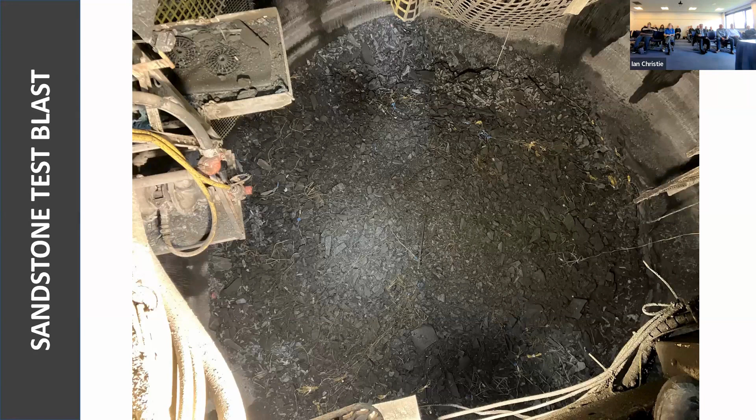You don't see much because the water splashes up at the camera, like. But yeah, good result. So that was just showing that again. How are we doing for time? 6 minutes - the rest of it is more to do with the magazines and other bits and pieces if you want to see it, take it through to just after 2:15.

Yeah, okay, so magazine setup. All we're missing is a few SAS guys on each corner.

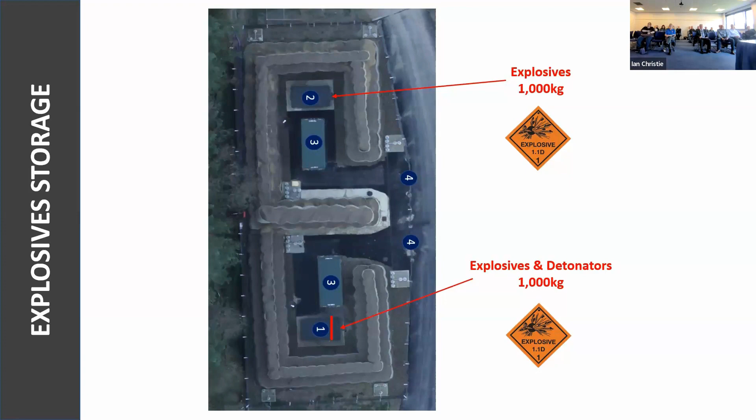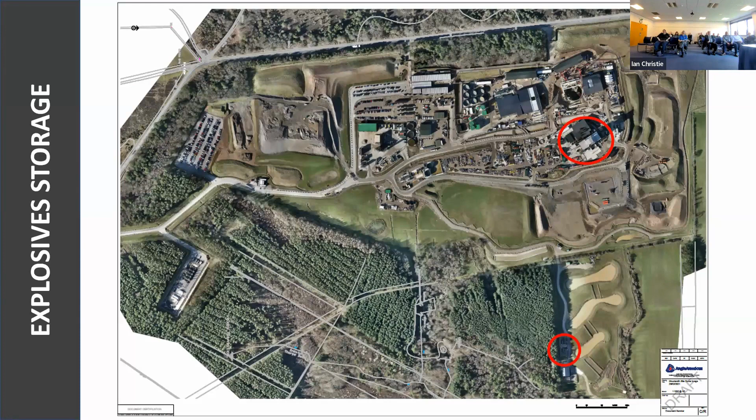We've got 2 magazines tucked inside each wing, inside the HESCO military bunding. We're allowed 1,000 kilos in each. Detonators actually are in that little area where the red line is on the bottom one - the detonators are in a little cupboard on the side. That's where the MTS shaft is. I know we're working on the others, but just to give you an idea, it's only like a 500 meter drive up from the magazines to the shaft area. That was so - the Brexco magazine at the back.

This container here was somewhere where we could do track and trace, cutting power split, preparing the gear. Products - we've got both there, got some Brexco stuff, Austin, nice and tidy. Detonators in the little cupboard, Icon 3s.

Yeah, we're using the X-Tray. I think you've got one now, Johnny, haven't you? Yeah, to be fair, it's actually quite good. It's the newer version now. We did have that one, but we're on the newer one. It is quite good.

Detonators, we take them out of the Icon boxes and put them into these. These are really good, you've seen them before with the lasers and all that. They keep the dets in, because you can imagine you're climbing in and out of those buckets and it's shitty down there. So you open it up, grab one, the lid almost closes itself, then you charge that hole and come back and they're all clean. If you take them in the cardboard, the floors get wet and it all falls apart.

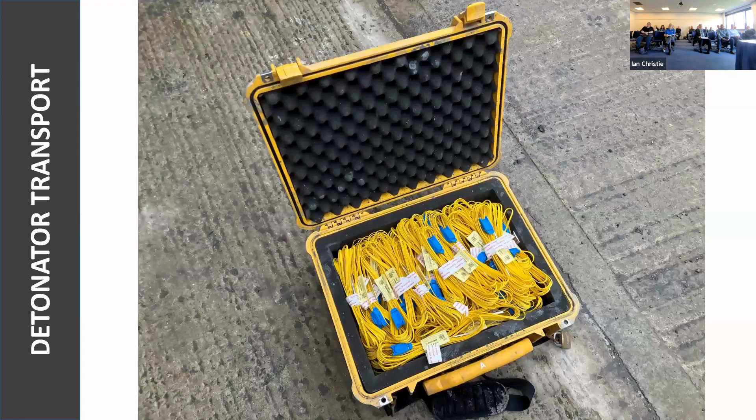That's an old photo now showing how we transported the dets, tucked on the back. We switched now to Land Rovers - that one was a Toyota Hilux.

Cast boosters we would do the same, put them in yellow cases and take them with us. Whereas the Powerfrag and Emulex, we'd just leave it in the boxes because you tended to use most of it, so if the boxes got turned to mush it didn't matter. But certainly the cast boosters and dets were kept in the Peli cases.

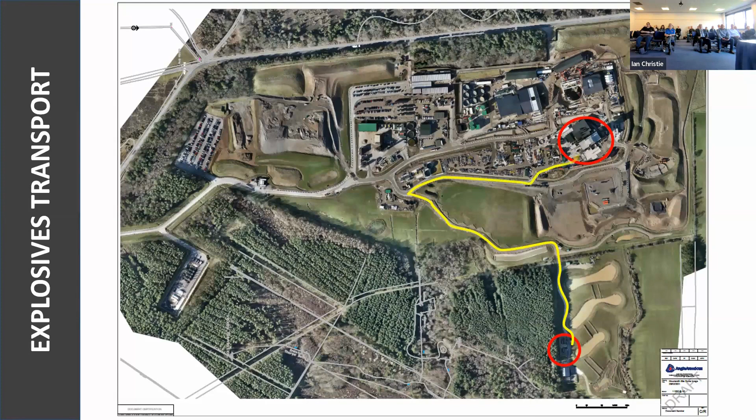Blast specs - I tried to bring in all the best stuff from the quarries. Yeah, we know the quarries regs, you've got the blast specification, but underground doesn't necessarily know that. It's not necessary for any of it.

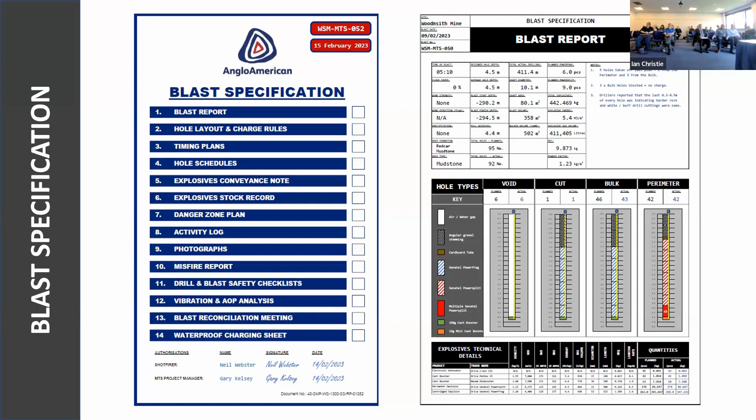So I brought in all the best practices I could, showing charges and all sorts. It wasn't a waste of time, but it kind of was - they're so used to not having it that they didn't really see the point in having it. So ultimately I've cut back on the amount of stuff I produce. We used to produce full-on packs like you would in the quarries.

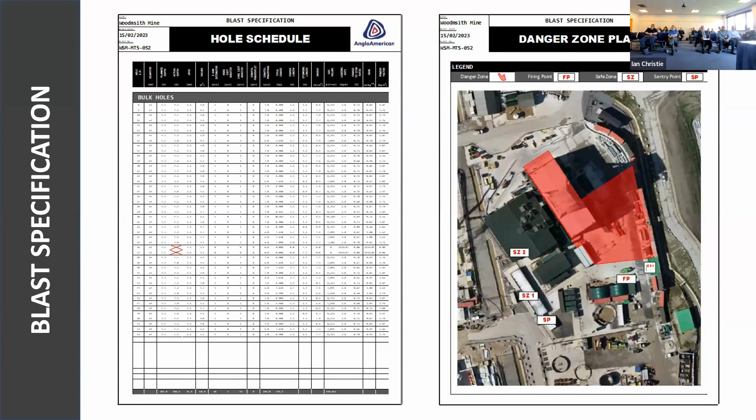Now I don't even print them, they're all on PDF on the laptop - timing plans, hole charging depths, what's gone in each hole, danger zone plan. That's kind of what it looks like now. I've condensed it all into one A3 sheet which tells you almost everything you need to know, the roadway it's in, everything.

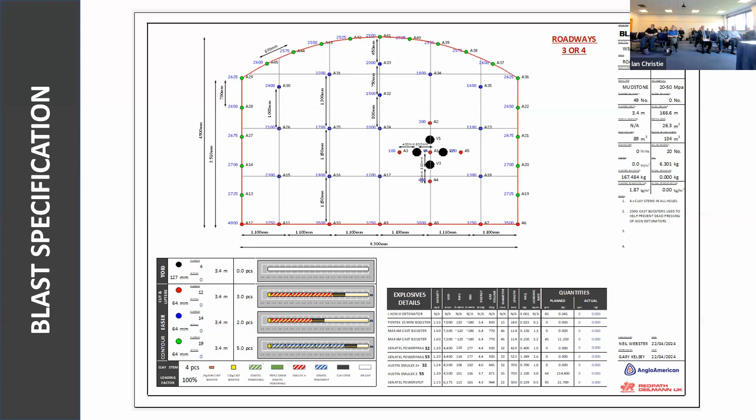I love my Excel sheets, as you know. Danger zone checklist, like I said - Anglo wanted them to be robust, so we have these checklists. Stock record sheet.

And training, OCD to the max - I've got folders with labels, and we're trying to get everyone through the underground blasting on the MPQC side. Those three lads at that time, these two were shot firers, and this one was down - he got the storekeeper endorsement on the back.

So that's it, and that's a question there which Stephen's already answered - it was to win a bag. Stones, the question was what was the diagram, and you got it right.

Scaled depth of burial - I'd never seen it before till I went to Woodsmith, and I used it on that blast underneath the SBR. It takes into account your stemming heights, your hole diameters, and a bit of charge. When you look deep into the calculation, once the charge goes past a certain point, it doesn't really matter what you put in the hole. So it's quite good, and so you've won a bag.

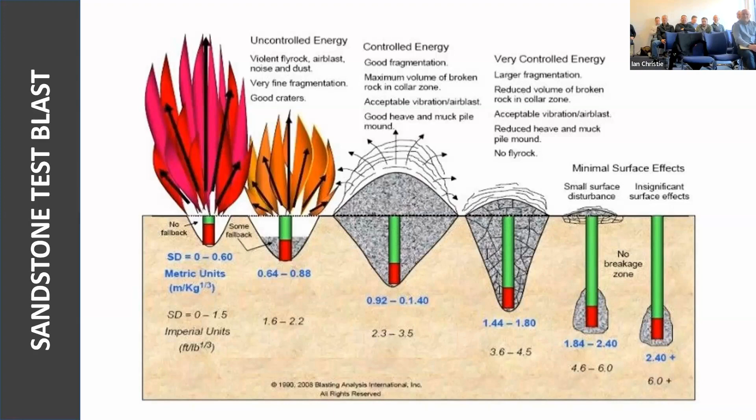That was a fantastic job. That was really interesting, something different to the usual quarry stuff they were involved in.

So, some questions - I've got a few. You also had water in the shafts, so how bad was the water problem in getting it extracted back out of the shaft again? What we would do is lower one of the muck buckets empty, put a pump into a low spot, then just pump it into the bucket, send the bucket up and tip it. So it sounds a bit pieced together, but that's the only way.

There was no way of pumping it all the way up 300 meters in the pipe, so we literally pumped it into a bucket, and when it was full, sent it up. That happened maybe twice or three times a day. When they were drilling, if you had 4 rigs going, that's a lot of water - maybe 4 buckets worth per drilling cycle. The buckets are quite tall, like 2 and a bit meters.